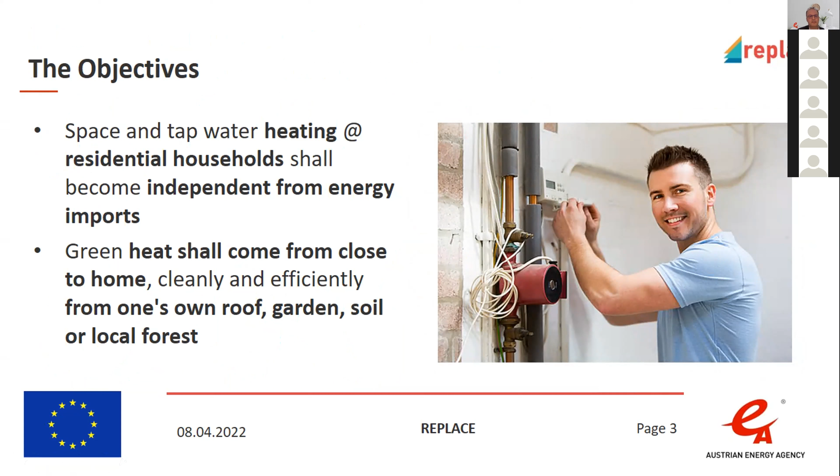Our project objectives: first, space and tap water heating at residential households shall become independent from energy imports. Second, green heat shall come from close to your homes, cleanly and efficiently from one's own roof, garden, soil, or local forests. So it's all about becoming independent from energy imports.

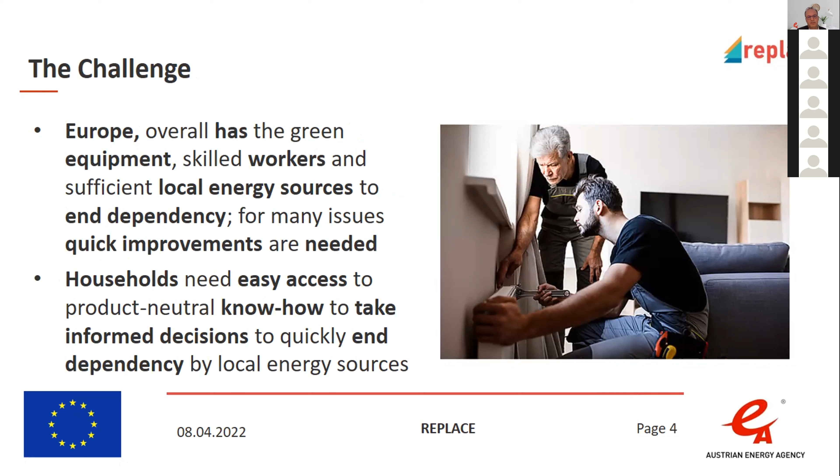In Europe, we generally have the green equipment, skilled workers, and sufficient local energy sources to end this dependency. But many issues still have to be improved, and quickly. From our view, households need easy access to product-neutral know-how to take informed decisions and to quickly end dependency on imported energy through local energy sources.

So we have developed a couple of tools that should be quite helpful to enable informed decisions. One of them is the interactive online heating matrices. You see here, like in a traffic light system, which energy systems fit to which houses in terms of energy consumption or refurbishment status. That's a very quick picture of what system goes with which house.

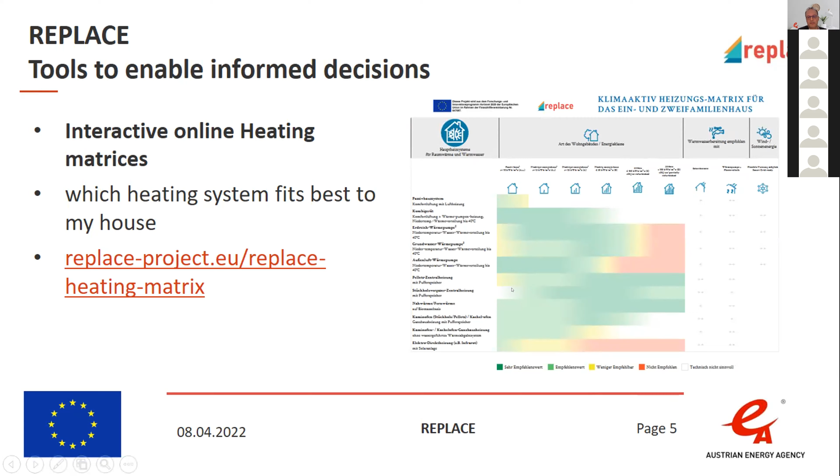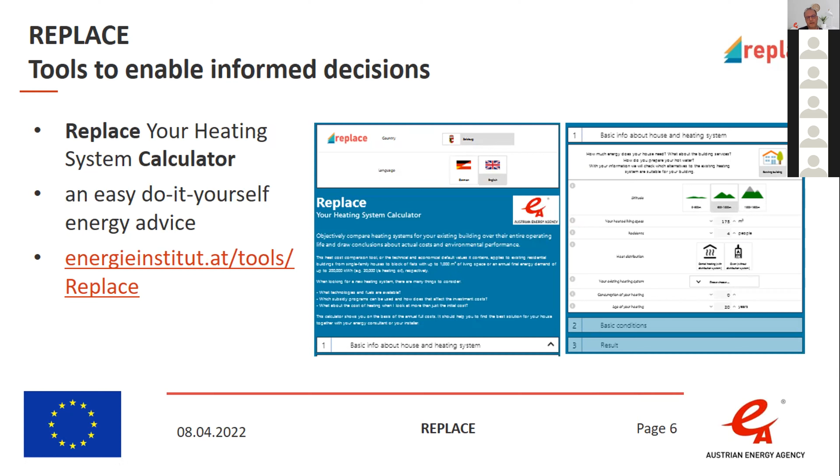Later today I will show you the details of one of our core tools: the replace-your-heating-system calculator. It's a kind of easy do-it-yourself energy advice tool. You will hear more about this later.

We have two handbooks developed with all information useful for households on one side, and a second handbook with information for professionals and investors. All these tools are free of charge and accessible via our website.

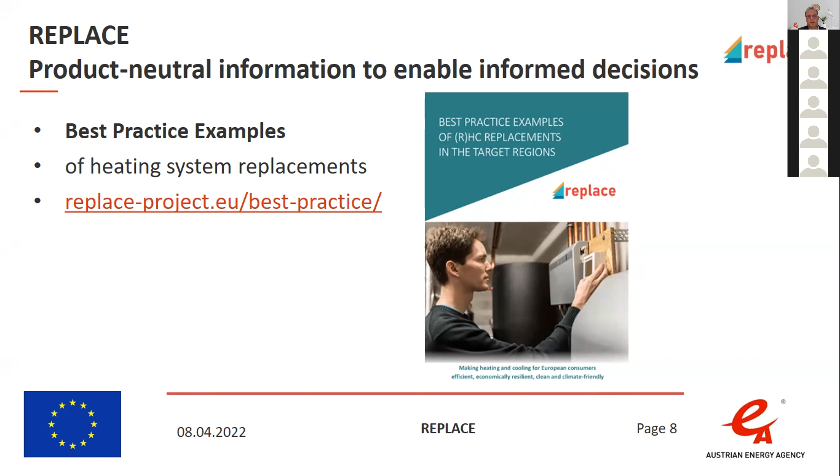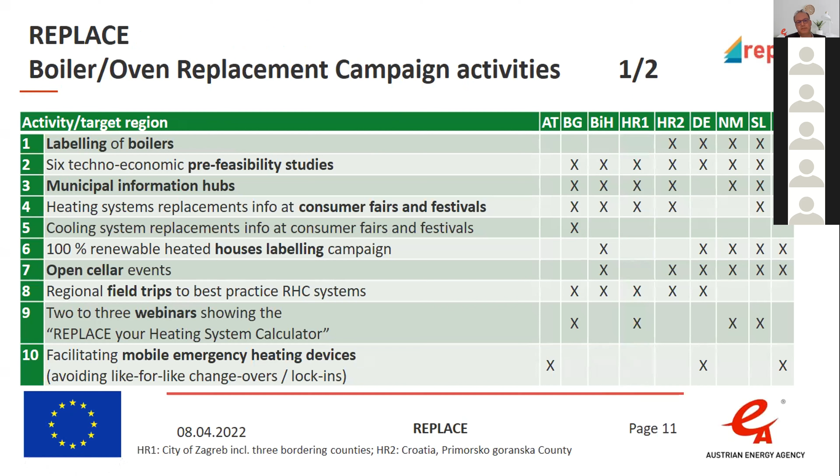Another core point of our action is that we establish local working groups of people who are really active in each region in terms of the heating market, and we developed with them jointly tailor-made activities. There's a long list of activities which we developed over the last 2 years, and for 1 year now we are actually implementing this long list of activities. It's really long—you will hear more about this in the next 2 hours.

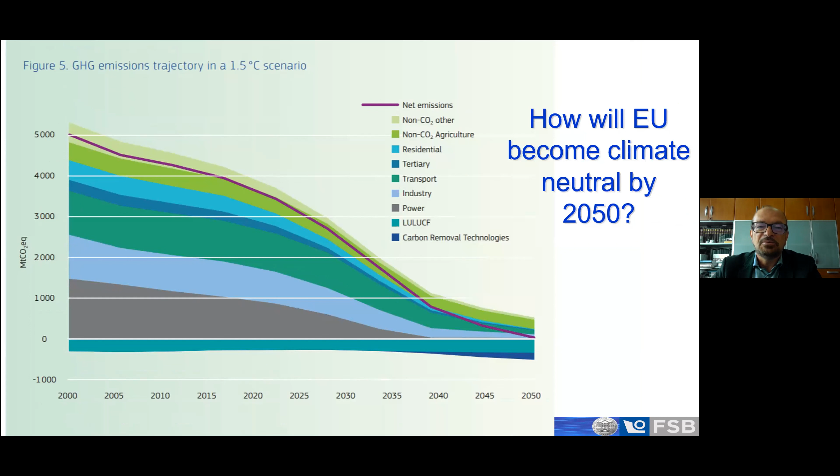I join Dominique in saying how timely this workshop is, and how bad an idea it was to make residential heating dependent on fossil fuels brought from far away, from a country we are now at war with. We obviously have to quickly decarbonize—even from the climate perspective alone, we practically have to decarbonize heating by 2040. One has to take into account that equipment installed for heating usually has around 20 years lifetime, so basically we are still installing fossil fuels in homes, and we have to remove it, from the climate perspective, by 2040. From the energy security of supply perspective, we should do it by 2027, or more probably even by next winter. So there is a certain urgency to do this.

Which are the ways to decarbonize heating? We have four possible pathways. One is district heating and cooling, which is the most versatile way for urban heating, because we can use waste heat coming from industry and services. We can use solar energy, geothermal energy where available, heat pumps, biomass—whatever. Everything can be put into the heat stream and brought to our homes.

Or we can use heat pumps as an individual heating system. There are two other ways which are not so good, in my opinion.

One option is gas decarbonization using biomethane, hydrogen or e-methane instead of natural gas. The problem with such an approach is that we need 5 to 6 times more primary energy in order to produce such hydrogen from renewable sources, which means 5 or 6 times more land has to be used for primary energy production, which is not a very good idea.

Another thing is that we will have lots of hydrogen only after 2040, which is much too late for decarbonization of heating. We have to do it now. Also, biomass boilers, which we use a lot in Southeast Europe, are not really a very sustainable way of doing it because local emissions are hard to control. And anyway, we should use biomass in a cascade for more high added value products and only use waste biomass for heating, preferably in district heating.

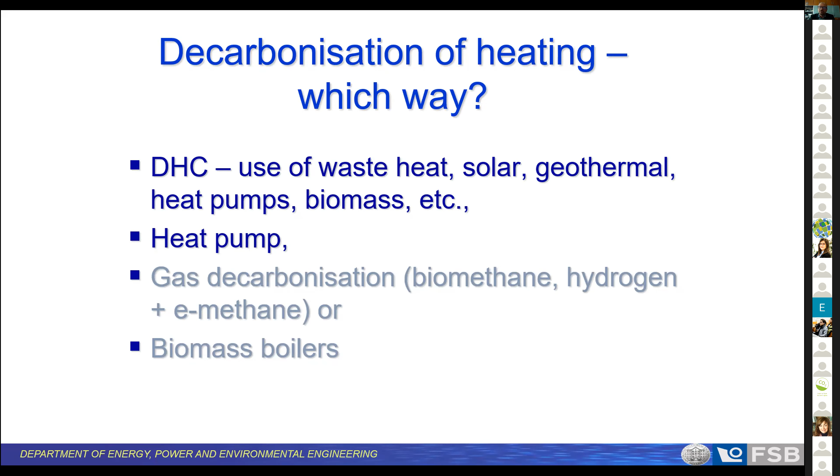What if we all go the fashionable way with heat pumps? One has to think that if we replace all the heating with heat pumps, the heat peak is around 5 to 20 times higher than the electric peak. At low temperatures, when the peak occurs, COP of heat pumps is around 2. That means we need 2.5 to 10 times more electricity, which is not really a way we want to go. We can, of course, solve it with heat storage, but we need around 3 to 4 cubic meters per dwelling.

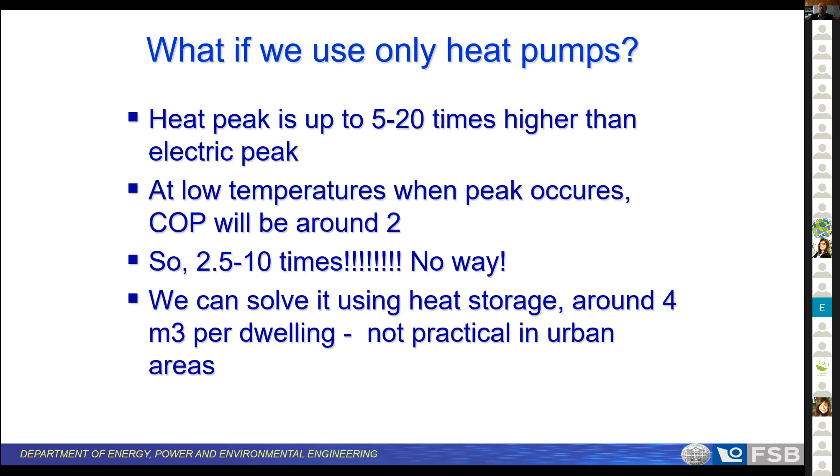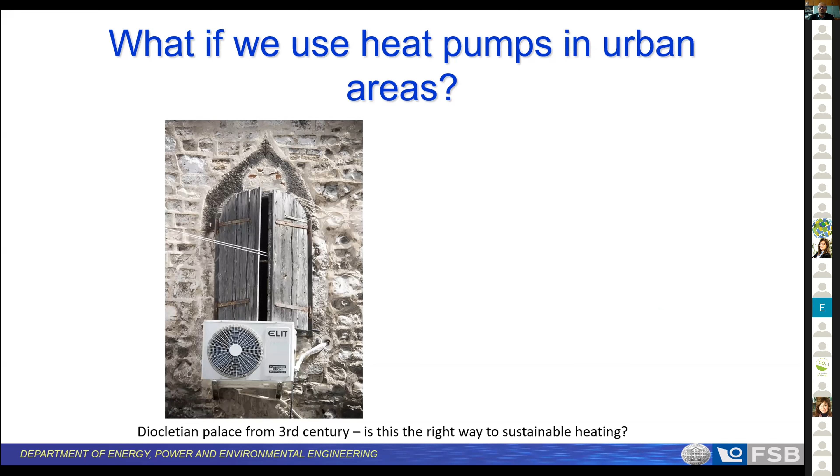That is perfectly okay in rural areas, but in urban areas we don't have space to do that. So district heating is an extremely important way to solve decarbonization of heating in cities. Also, we don't really want to have in lovely urban historic areas something like this. This is from Diocletian Palace from the 3rd century in Split. We think that district heating and cooling is a much better solution for such areas.

Looking at Linz and Wels, where we would love to be, we can see the Heat Roadmap Europe map, which shows which areas are feasible for district heating. Those are the areas where we have high demand for heating concentrated, because that makes district heating viable. You can go and see on the Peta 4 website, and you can see for your own areas where it is feasible to do district heating and where we have to go with heat pumps. We have also done additional maps for Macedonia, Croatia, Bosnia in the Southeast Europe area.

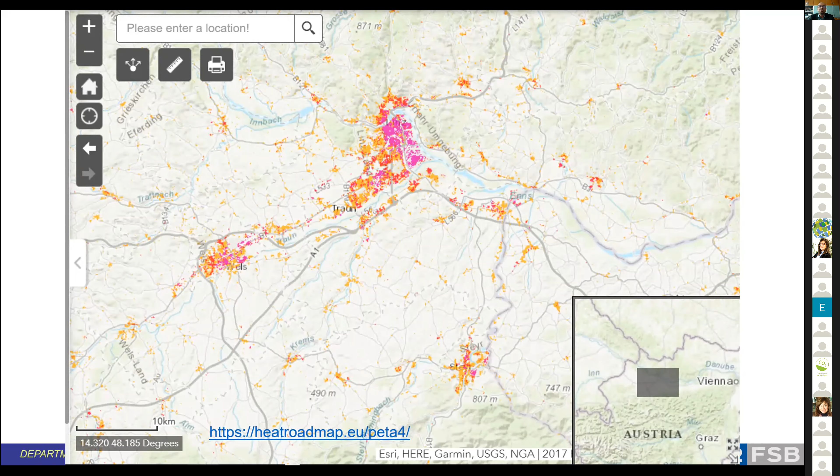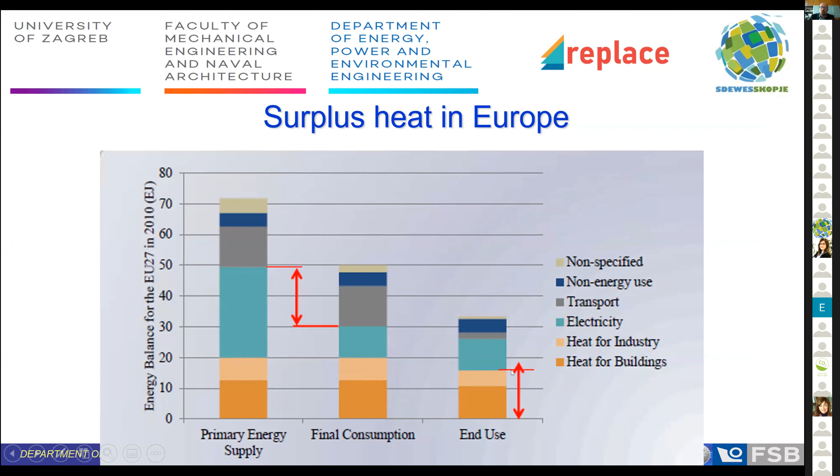If we look at surplus heat in Europe, or waste heat, there is plenty of it. Only from major sources we have enough to cover all of the heating demand in Europe. Unfortunately, we cannot use all that because waste heat is not always where the heat demand is. But in Heat Roadmap Europe, it was shown that around 50% of the heating demand could be covered by waste heat from such large sources.

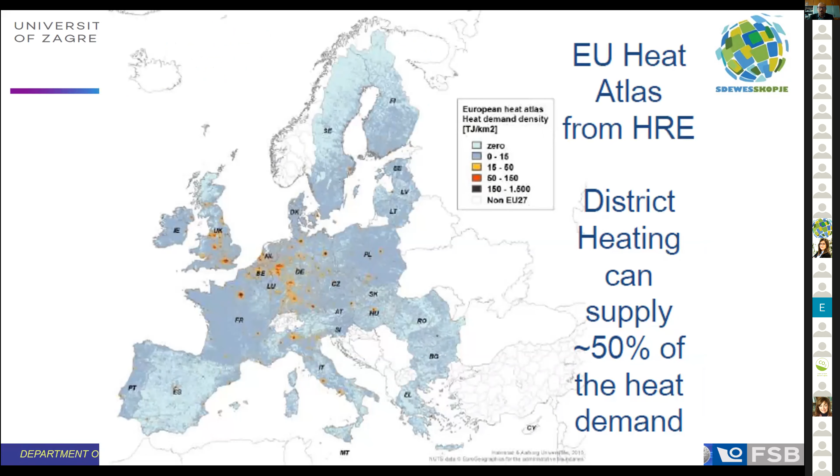Also, we have to think about moving towards 4th generation district heating, reducing the temperature to 60 to 70 degrees in our district heating systems, because this allows us to better integrate power and heating systems, which we will need in future. Because the ratio between heating and hot water is much lower, we have a much more continuous heat load. We need to think about heat storage, because this is a crucial part of the fully decarbonized energy system in Europe. Currently, we will still be using combined heat and power, which will be following electricity demand, so that means we need heat storage.

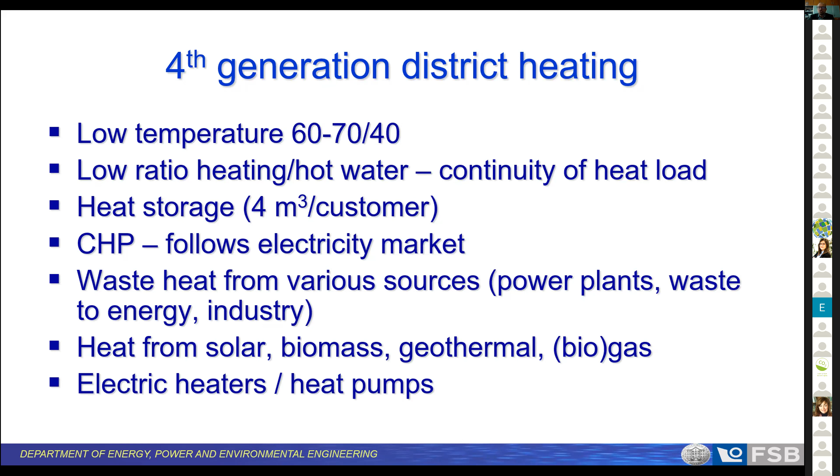We should use waste heat from various sources like power plants at the moment, waste to energy, industry, services, wherever we can find it. Heat from solar, biomass, geothermal, biogas, electric heaters, and heat pumps are solutions that can be used in 4th generation district heating.

If we look at European policy, district heating up to 2025 should have, in order to be called efficient district heating and to be part of the taxonomy and considered a good way of decarbonization, at least 50% renewables, or 50% waste heat, or 75% of cogenerated heat. After 2026, it should be at least 50% of renewables, or 50% waste heat, or 80% of heat from high efficiency cogeneration, or at least a combination of such thermal energy where renewables are at least 5%, and the total share of renewables, waste heat, or high efficiency cogeneration is at least 50%.

So one can see that in time we have to move to more renewables, to more waste heat, and to more efficient cogeneration, which should be completely phased out after 2035. We don't want to use any more fossil fuels after 2035 in district heating.

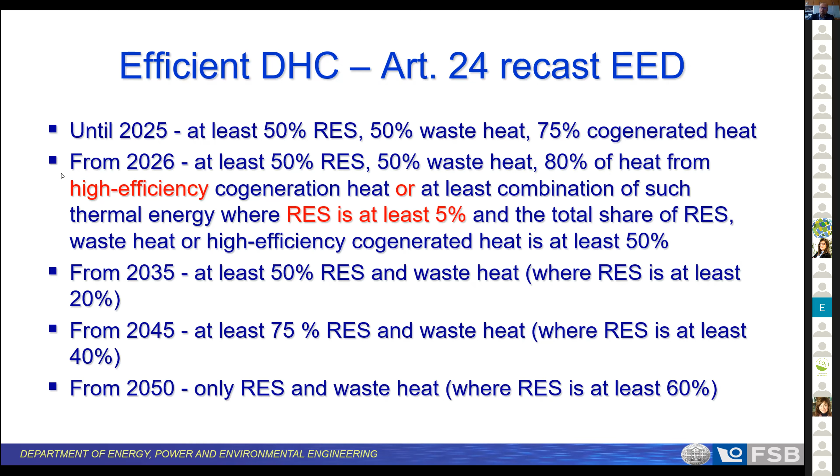We can see this example of solar district heating in Vukovar. It means that even when Russian gas is cheap, as it used to be in Croatia, it's actually viable to use solar district heating for summer demand. So it makes sense to replace fossil fuel boilers during the summertime with a solar system, because then you can supply all the hot water during that period of time.

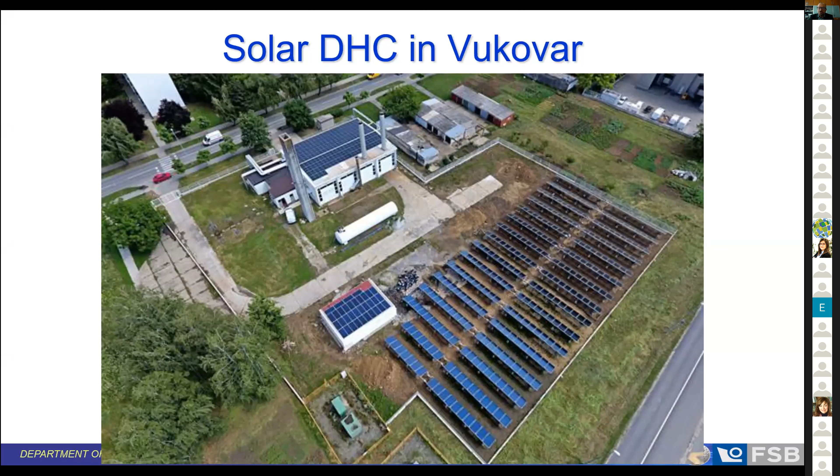The problem with solar energy is that its peak is in summer and we need heating in winter. Therefore, if we want to go beyond summer months into solar district heating, we have to have thermal energy storage. One should note that the price of thermal energy storage falls strongly with size, so for district heating based on seasonal thermal storage, it's actually not very expensive.

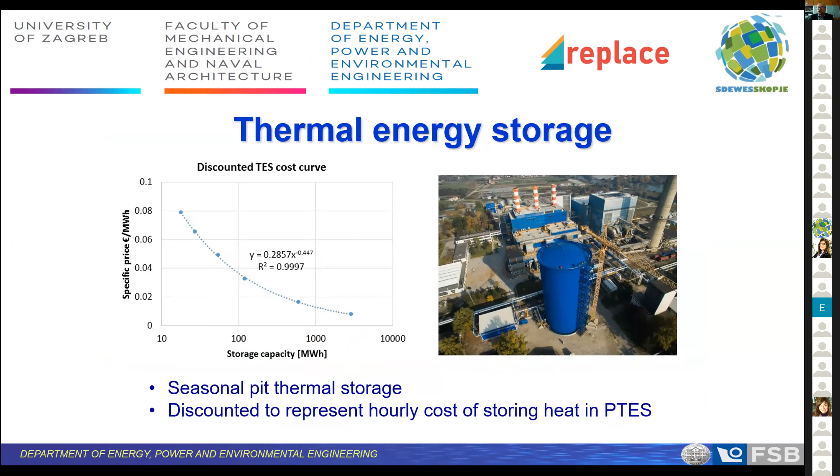Funnily, in Denmark there are a lot of such systems. In Germany there are also such systems. But in Southern Europe, which has much better solar potential, we don't have many such systems. They can actually make financial sense if the financial mechanisms are designed so that the full socioeconomic benefits are taken into account.

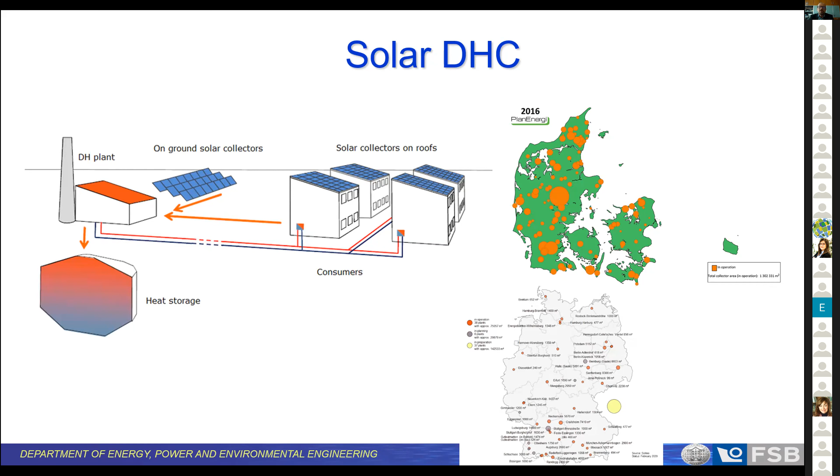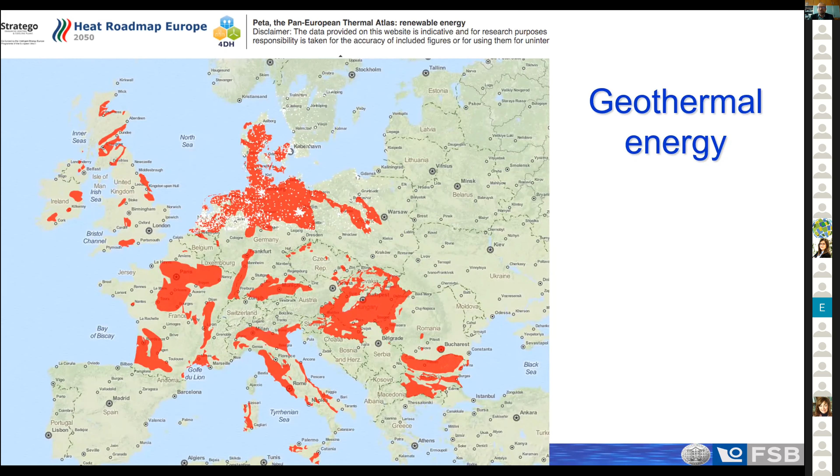One should also note that Europe is full of geothermal energy, and some areas like Pannonia, where I'm sitting at the moment in Zagreb, could be fully heated by geothermal energy. We are not really using this energy because gas is king in those areas, and it's very difficult to penetrate their market share. On the other hand, with expensive gas now coming and the need for fast removal of gas boilers, I think geothermal energy will become very fashionable.

Where do we want to go? We are moving towards a system that will mostly be based on wind and solar. Wind and solar are variable, and we will have to build a big excess of them in order to fully cover the legacy electricity demand, which is time critical. This is the red line. What are we going to do with the excess wind and solar? Well, we can use it to heat, and to deliver it to electrified transport.

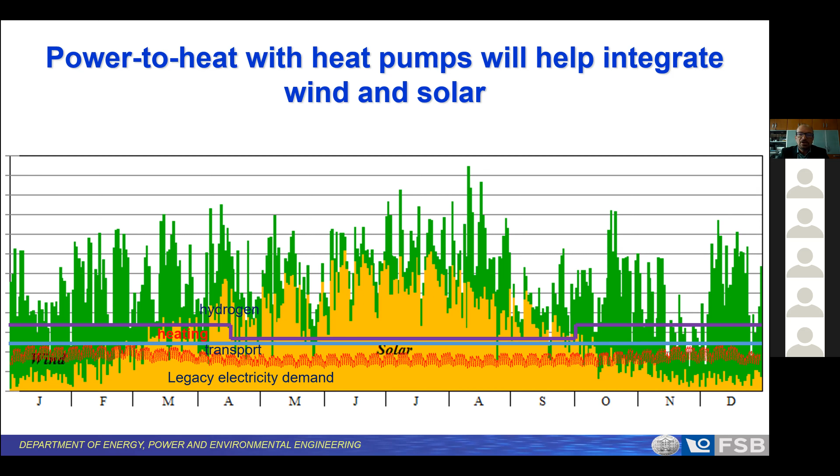Power to heat technologies can significantly help the energy transition towards 100% renewable energy systems. We need this power to heat connection because it is crucial for the future integration of variable renewables.

In conclusion, I would like to say that wind and solar are coming, but they're difficult to integrate. We need to integrate power, heating, cooling, water, and transport systems as soon as possible. We need smart energy systems, which have to be cheap and simple. We have to concentrate on district heating, which is very versatile in integrating various heating flows in urban areas, and heat pumps in rural and suburban areas. We should integrate all kinds of renewables, including renewable electricity. We should take care to use biomass only in cascade, not really chopping trees for heating, but using wooden biomass for higher added value purposes and only waste biomass for heating.

Thank you very much.

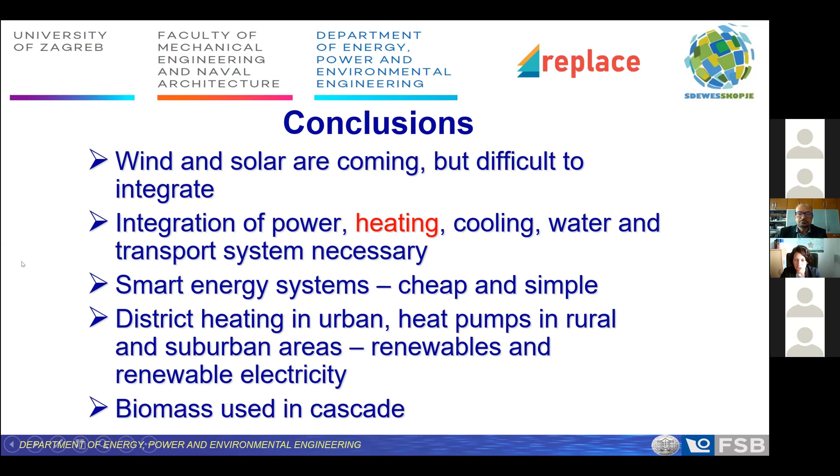Greetings from Munich. Many thanks for your very nice presentation. I am part of the WIP team, though I have not been directly involved in the Replace project, so maybe this question is already answered. When you talk about waste heat from power stations and industry, isn't that waste heat from fossil sources mainly, currently? We know especially energy intensive industries have a lot to do to replace their fossil sources, so maybe there will be less waste heat in the end. It seems even more complicated than you were saying. How would you respond to that?

Yes, you're completely correct, it's now mostly fossil energy. But waste heat is the heat that would otherwise be lost into the surroundings. So if we catch it instead of wasting it into the environment and polluting the environment with this heat, we are actually doing a great service to the environment because we are not using other energy for heating. And we have it today.

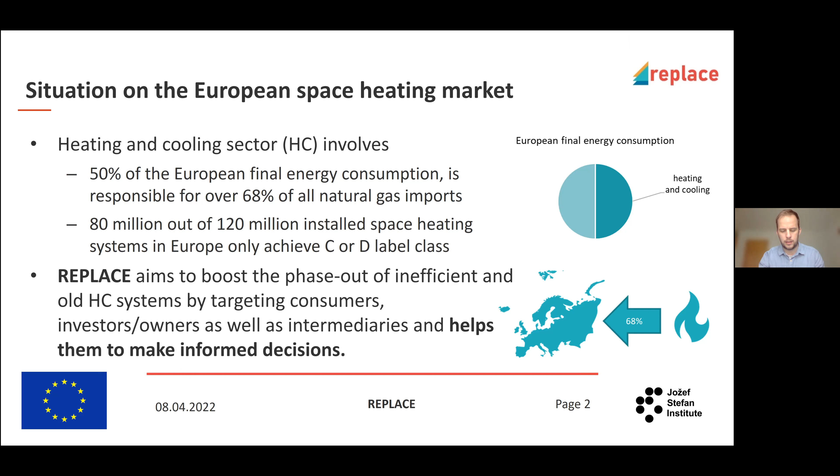Replace project therefore aims to boost the phase out of inefficient and old heating and cooling systems by targeting consumers, investors and owners, as well as intermediaries, and helps them to make more informed decisions. Facts regarding high share of inefficient boilers, need for fossil fuel replacement and energy independence give rise to motivate end consumers to replace their equipment as quickly as possible with more efficient, environmentally friendly alternative systems.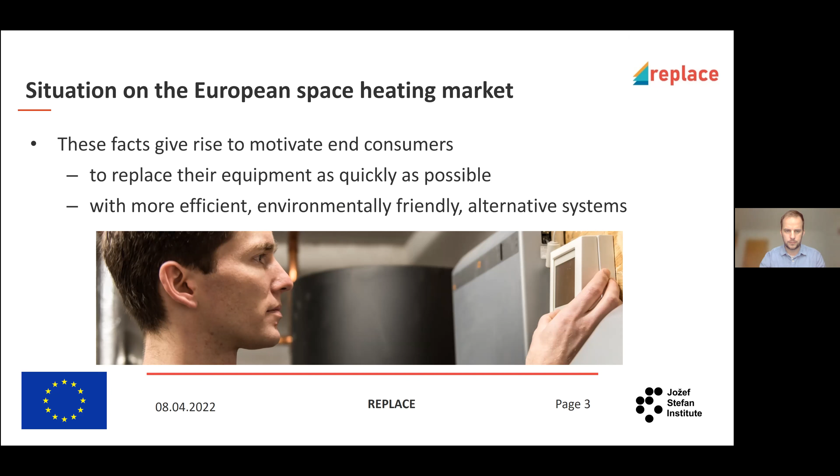This is the point where Replace project comes to aid. The first overall objective of Replace project is to implement targeted campaigns to make heating and cooling for European consumers efficient, economically resilient, clean, and climate friendly.

All activities proposed by Replace aim to inform and motivate consumers to replace their old and inefficient heating and cooling systems with better, greener alternatives, with the benefit of monetary savings and improvements in air quality, comfort, safety, and security of supply. The project focus is on the residential heating sector.

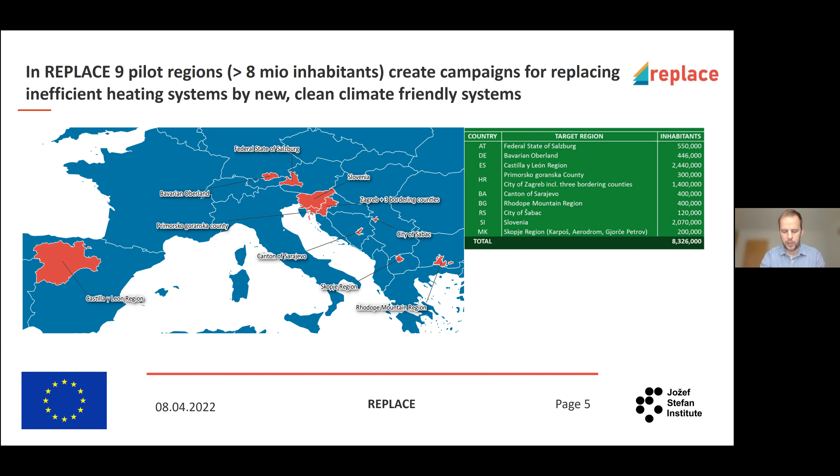Replace project overall targets over 8 million end consumers directly, with an estimated direct impact of about 8 gigawatt hours of primary energy savings. To actually transpose the project's objectives during and beyond project life, every project partner establishes and cooperates with a local working group, which comprises local and national key stakeholders residing in their targeted regions.

Key members of the local working group actively support the implementation of project findings in the target regions. All consortium partners can rely on strong local networks and are perfectly placed to steer the work of the local working groups, that also improve existing replacement policy programs and implement tailor-made policy measures facilitating the execution of the campaigns.

One of the most important results of our projects are the tools that can be used in order to aid the decision-making process. When replacing inefficient heating systems, the Replace heating matrices provide an initial overview. They show which type of heating system based on renewable energy sources or a connection to district heat is most suitable for single or double family houses or for larger volume buildings.

What kind of system is recommended depends on the energy need for heating according to the energy performance certificate.

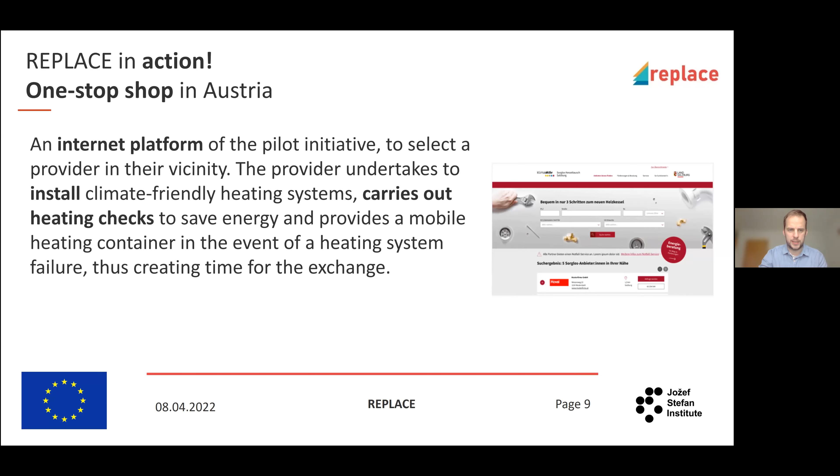The next success story is from Bulgaria. Replace project partner BSERC was directly involved in increasing the subsidy for renewable heating systems at the national level sevenfold, to 70 million euros. To ensure end consumers have climate-friendly pellets for the coming winter, BSERC is also organizing a joint purchase for municipalities in the summer of 2022, which will also positively affect the energy price.

In Spain, they have a new subsidy scheme. Project partners EREN and ESCAN organized a workshop for professionals, where 41 participants learned more about climate-friendly heating so they could pass that knowledge on to end consumers. Project partners also made knowledge about biomass directly available to end consumers, where 200 houses and 200 boilers are getting an information label. Ten information hubs have already been established, and most importantly, a new subsidy scheme developed by EREN is helping switch a total of 10 megawatts of residential boiler capacity from fossil fuels to biomass within a few months.

One more story is from Slovenia. There, everyone who wants to apply for a subsidy for climate-friendly heating automatically benefits from the Replace heating system calculator. This is because the office that awards subsidies advises all applicants that they can calculate their energy and monetary savings using the Replace heating calculator, where they receive information on suitable climate-friendly heating systems for their exact situation for their funding application. Furthermore, there was a collective action where we switched over 134 oil boilers to heat pumps. So this would be all from my side.

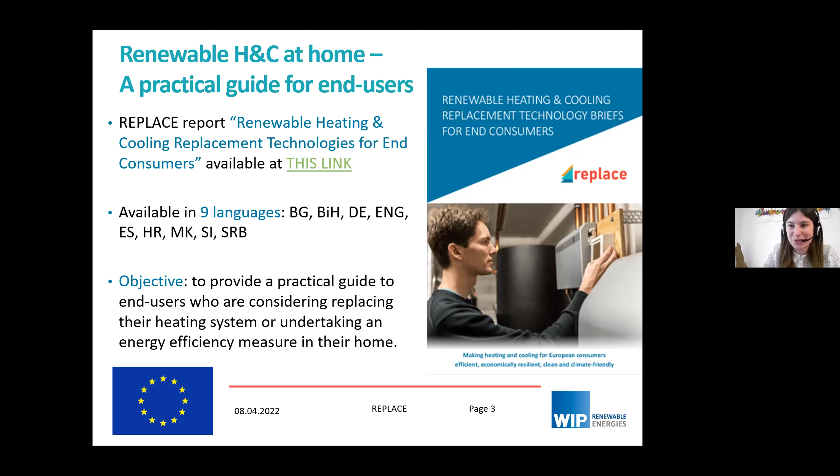Of course, I cannot read the whole report right now, but I hope this presentation catches your attention and attracts your curiosity so you might want to download and read more about it. To give an overview, the report provides useful information on the benefits of replacing an old and inefficient heating system with an innovative low carbon and renewable system, covering the economic, environmental, and social benefits.

We advise consumers on the steps they should take to make an informed decision when replacing their heating system. We provide answers to the most frequently asked questions end users ask in the replacement process. And last but not least, the report includes nicely illustrated and colorful technology fact sheets for each technology covered.

So which technologies are covered in the report? When you want to replace your heating system, there are so many options on the market today. The Replace project covers all the renewable heating and cooling options available in the European market, including biomass boilers for wood pellets, log wood and wood chips, modern wood stoves and pellet stoves, heat pumps, solar thermal systems, photovoltaics, renewable cooling, multifunctional facade systems, as well as other options that improve building efficiency like collective actions, shading and insulation, and infrared heating systems.

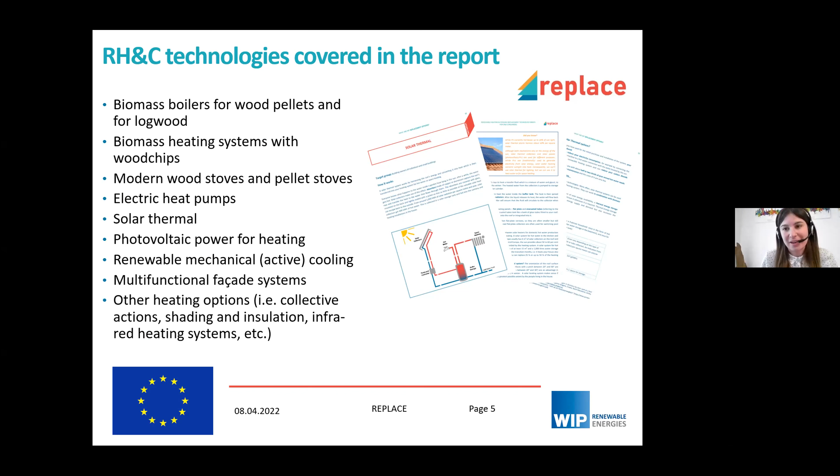One of the probably most interesting chapters for the end user is the one which advises on the steps to take when undertaking a replacement process. Just to give you an idea of what's in the report, we list all these steps, described in more detail there. For example, the first step is to get familiar with the technologies available on the market, and the Replace handbook is a very good tool for that.

As a second step, if you want to replace your heating system, you should check whether total or partial insulation of your building shell is needed on top of the heating system replacement, to ensure good and efficient functioning of your new system. You should get in touch with an energy advisor who can advise you on the best solution for your home, and estimate the benefits and costs of the replacement.

You should, of course, contact an installer to install your new system. Whenever possible, apply for regional and national incentives, which are available for many renewable heating technologies across several countries and regions in Europe. And lastly, just enjoy your new system and spread the word about how great it is.

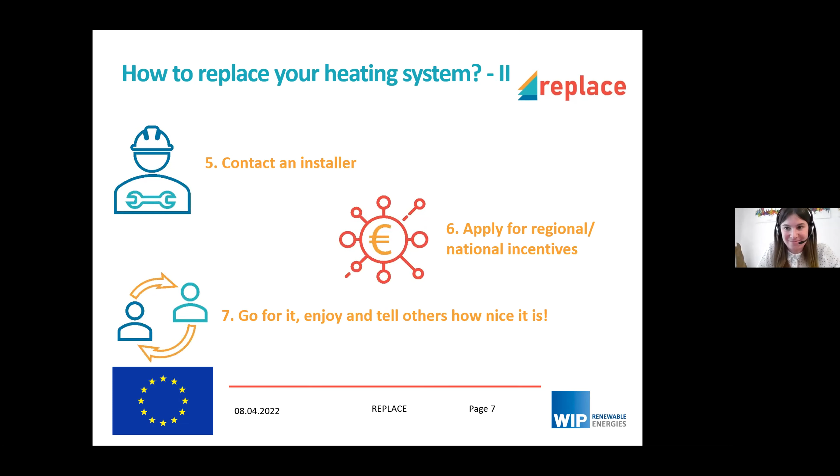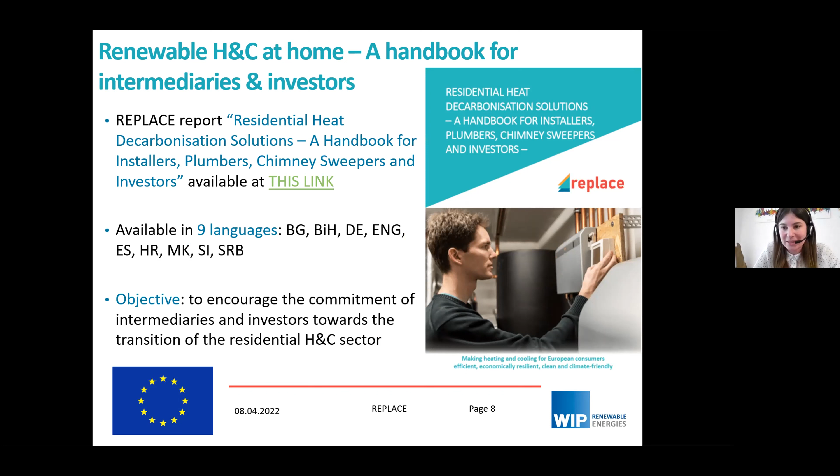The second report I wanted to present is the one we prepared for intermediaries and investors. This is also available on the Replace website, in the same 9 languages. Its objective is to encourage the commitment of intermediaries and investors towards the transition of the residential heating and cooling sector. By intermediaries, we mean installers, chimney sweepers, building developers, and energy advisors, and we provide them with in-depth knowledge of the renewable heating and cooling system options available on the market today.

In the report, we also provide tips for intermediaries on how they can become well-trained facilitators of replacements and communicate the benefits of these innovative renewable heating solutions to their customers. Because, as Dominic mentioned at the beginning of this workshop, one issue today is that not all installers are aware of all the benefits of the renewable and latest technologies on the market. The report also addresses investors—financing institutions, public authorities, energy suppliers, and homeowners—providing information about economic issues, best practices, and innovative business models and model contracts for renewable heating and cooling solutions.

Just to cover some of the chapters of the report, one of the chapters provides really practical tips to intermediaries on the replacement project phases they should undergo step by step when having a new customer and replacing their old heating system. So of course, the first step is conception and consultation with the customers, planning of the replacement project, design of the replacement project.

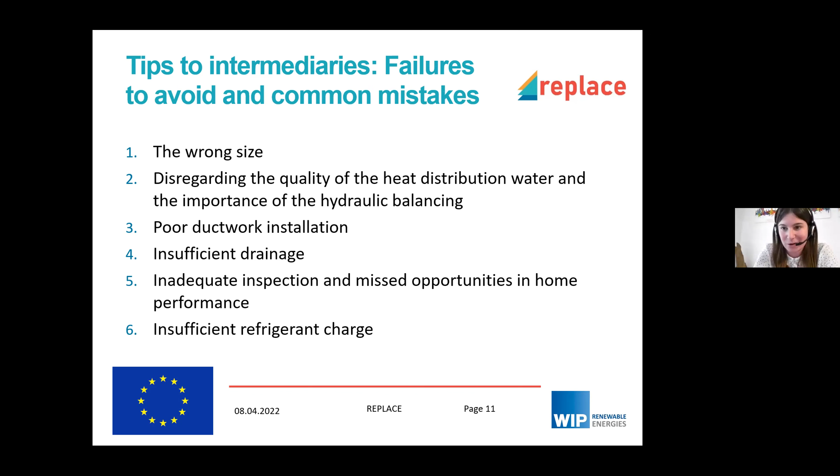This report for intermediaries and investors also includes fact sheets for the technologies covered by the project. The fact sheets are very useful tools for installers, because for each technology they say what is the best building type for that kind of technology. They provide planning guidelines and recommendations for installers, which technologies match with each other, and also suggest selling points for installers to convince their customers about the benefits of the renewable heating system they are trying to sell.

As I said, the report is directed not only to intermediaries and installers, but also to investors. For example, the chapter on investors covers the reasons why investors should invest in renewable heating and cooling. There are many reasons, and more details are in the report, but they include the high economic returns and the instability of fossil fuel prices, which we know today better than ever before.

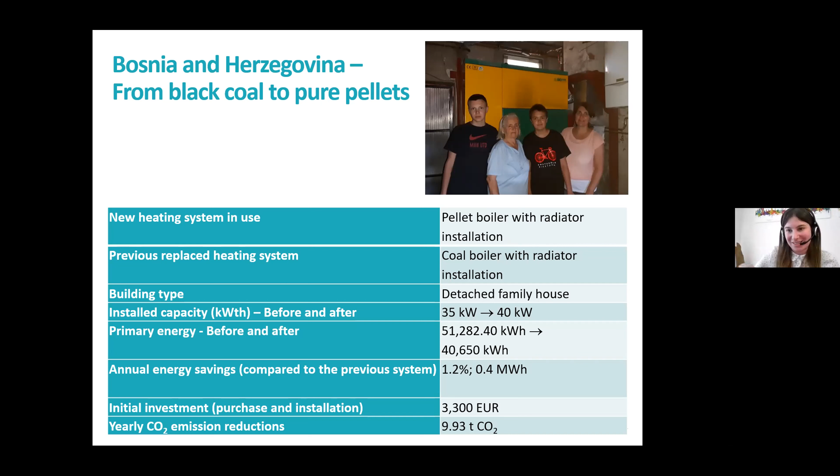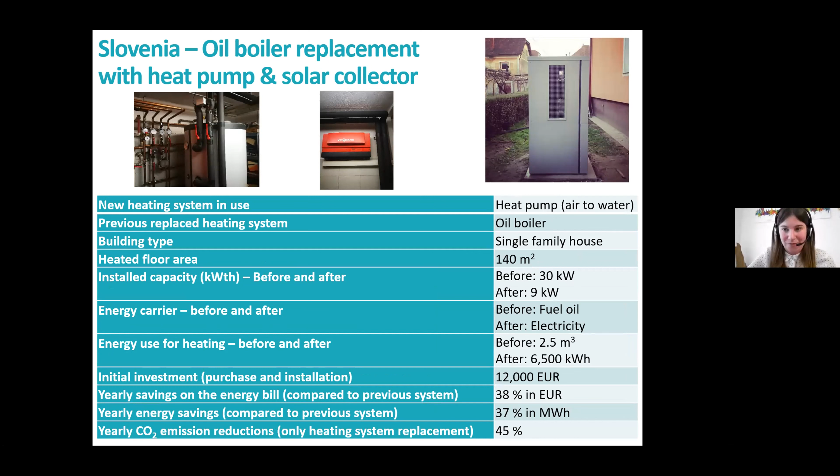Similarly, here in Slovenia, we had the story of a family which replaced their oil boiler with a heat pump and a solar collector together. And again, this switch brought significant benefits to the family and to the environment.

And last but not least, the example of a mobile heating unit in Germany to work as a bridge during the replacement phase of an old heating system into a new one running on wood chips. Since the replacement would take some years, the building in this case, the swimming pool of the city of Penzberg, decided to replace temporarily the heating system with a mobile container unit, which runs on renewable wood chips.

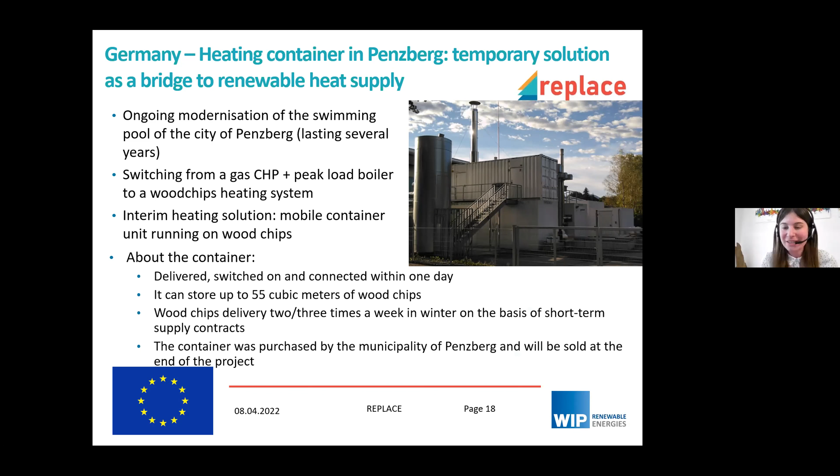We have a similar example also in Austria, and you can find many more in the report. And yes, all the reports, as I said, are on the Replace website. And if you have any questions, just feel free to ask.

Thank you very much, Benedetta, for your overview of all the handbooks and fact sheets that we have created in the Replace project, and also for the real life examples. I think it's always really nice to say that at the end of the day, it's real families who are actually saving money and also helping the environment. So that is lovely to see.

I don't see any raised hands. There was a question in the chat, a very good one on barriers, because we've now seen obviously every day you see fossil fuels is not a good idea. So the question is, why haven't we already done that? I think I will take that to the panel, because I think everybody will have something to say to that.

There is a question, I think, that is directly for you, Benedetta: to what extent can these tools be used for non-residential buildings?

Yes, so the main target of the project is residential buildings, but well, definitely some of these technologies can also be applied into non-residential buildings. Probably the fact sheets of the end users report and of the intermediaries and investors report really refer more strictly to residential households, but otherwise the description of the technologies is valid also for non-residential buildings.

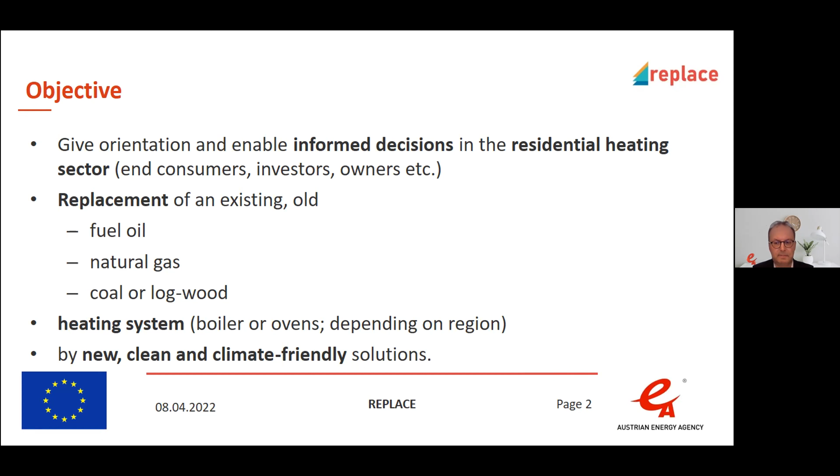Given you have an old fuel oil, natural gas, coal or logwood boiler or direct electric heating, this tool helps you to quickly see what information helps you to make a decision to move to an alternative renewable heating system.

So the basic situation normally is just that you have to think a lot about when you want to make a changeover, which technology, what fuels are available in your region. Do you have the possibility to connect to a district heating grid? Can I calculate some subsidies? Are they available? What are the costs of the heating system itself? And can I get an estimate what my annual costs will be, also including the investment, the upfront costs? This calculator gives answers to all of these questions and should enable the users to find quickly the best solution for one's house.

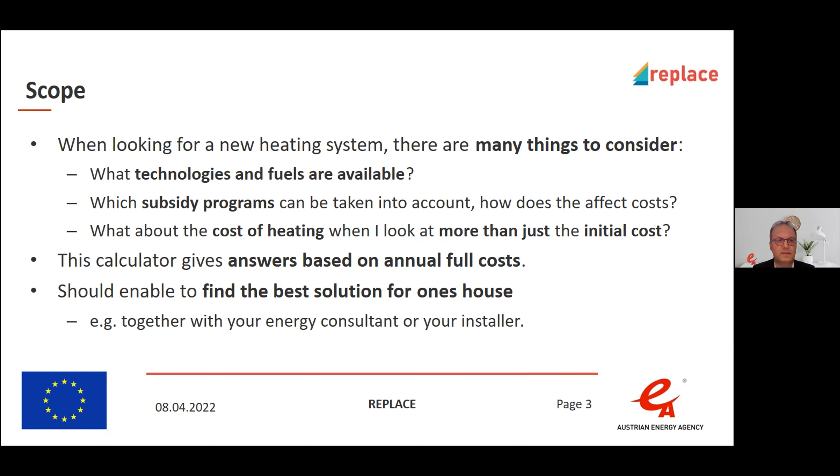This tool can also be used by professionals or for businesses, so there's wide scope to use it. The tool is free of charge, and there's a website address where it's available, and the partners will constantly update the tool.

It's multilingual, and it also has default values inside, which I will show later. The tool is also a white label tool, so businesses and professionals can integrate this calculator via a frame into their own website, or they can place a link to the calculator on their landing page.

If you are interested to use this tool as a white label tool, just contact the national project partner, they will help you. The calculator will be hosted until end of November 2025, so that's also a period that makes sense to integrate it into your business if such a tool is not available yet in your region, which is the case in many countries, as we experienced.

As I told, the tool was developed based on an existing tool in Austria. It features 8 European target regions and works in 7 languages, including for every region a version in English. The tool features technical and economical default values for a range of houses, starting from single family houses to larger blocks of buildings. It can cover default values up to 20,000 liters of oil consumption equivalent, so that's a far wide range where the tool can be applied.

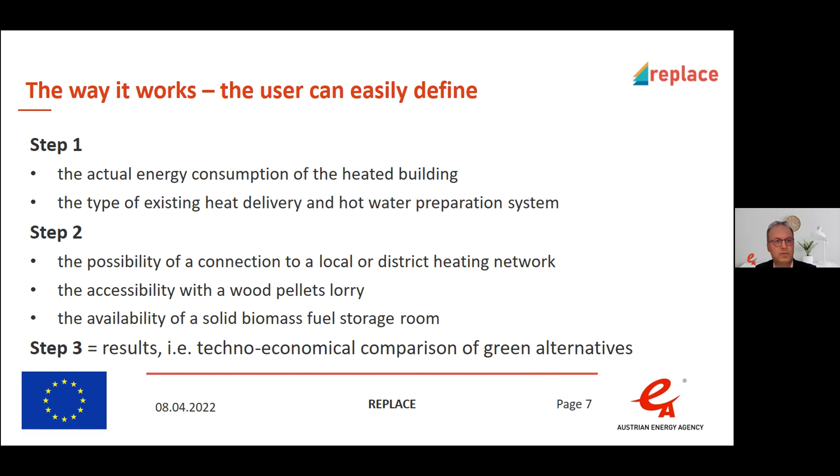I think I will show you this best within the tool. There's also a quick mode if you are a newcomer to this topic, or there's a professional mode if you don't just want to rely on default values, but if you have concrete prices and costs based on offers, you can input those actual costs for your situation. The tool also features the fact sheets that Benedetta told us about before, useful contacts, and best practice examples. All of those things are integrated into the tool.

Now I will show you live how this tool works to give you an impression. I will share my browser to give you an insight into the tool.

Just a quick example of how this tool works. Can you see it already? Thank you, Herbert. Yes, everything is good.

You start by selecting a region. I select, for example, the region in Austria. In Austria, we have 9 provinces, and I choose the province of Salzburg. Then I choose English so that all of you can follow.

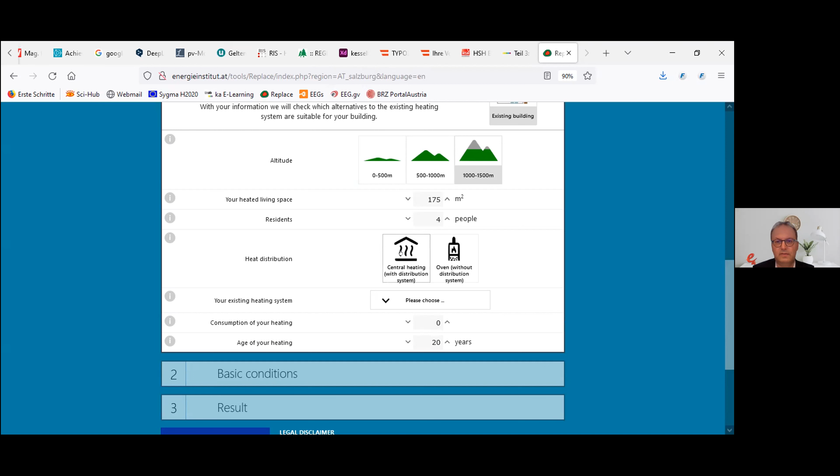You select the altitude your house is situated at, then give in the living space and the number of people living there, and whether your existing system is central heating or an oven. I select central heating, and then for both types of heating systems you can select the energy carrier currently heating your house. There's a wide range to choose from; for my old system, I choose oil boiler.

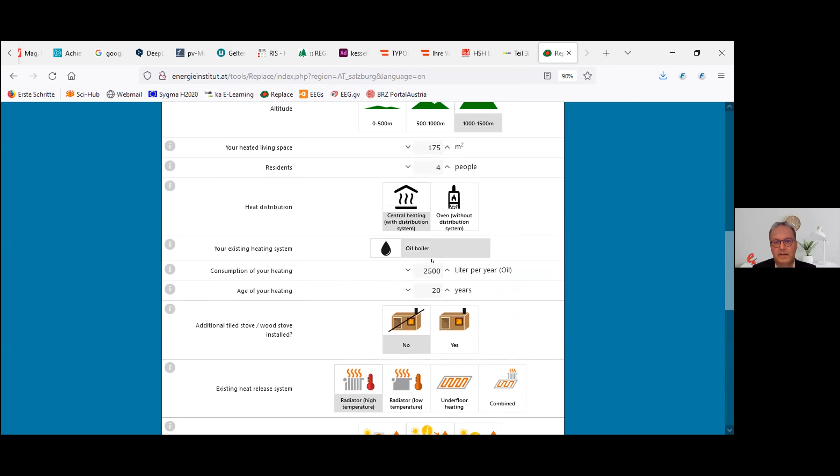Then the tool automatically suggests fuel consumption for a typical single family house in Austria, this would be 2,500 liters. I leave it as it is, and then you can select the age of the boiler, which determines the efficiency of the whole system. You can also add any type of stove if it's existing and enter the consumption, but I leave it as it is.

Then you'll be asked for the type of heat release system, whether it's a high temperature system or a very low temperature system. This also has an influence on the technologies you will be recommended, and on subsidies available, if any, because in some countries, if you have a radiator, a heat pump won't be subsidized, for example, and the tool takes that into account. I leave here the radiator.

Then you can determine for your new heating system whether the system also provides domestic hot water or not.

And then you can also choose if you have a solar system or not, or if you want to have a new solar system, for example, and for what purposes this solar system should work—if it's just for space heating, just for tap water, or also for space heating. Then you confirm. That's all you need to know about your home.

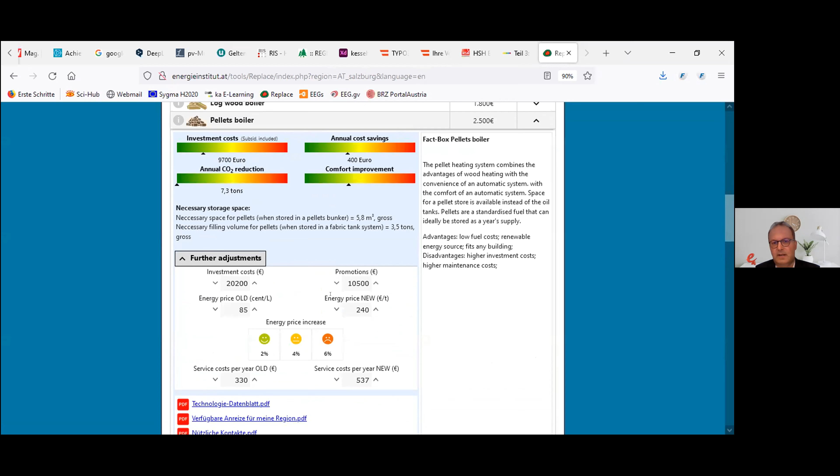So the default value would be 20,000 euros investment, 10,000 euros promotion. Here you can change the energy prices of the old system, oil, and the new price of pellets. You could also change the maintenance costs of the old system and the costs of the new system. And then, for example, now the oil prices are much higher currently.

And then you would have to update, and you would see that the cost savings increased from, I think, 400 euros I had before to 2,300 euros.

So that means you have a very quick overview, and you can get a lot of information from this tool, with many technology options to choose from. I think this tool is really helpful, and I recommend you take a look into it. There's a lot of additional information—for example, myths and facts—and also whether you should refurbish your house before changing your boiler. All these things are covered by this tool. So that was what I wanted to tell you about this tool.

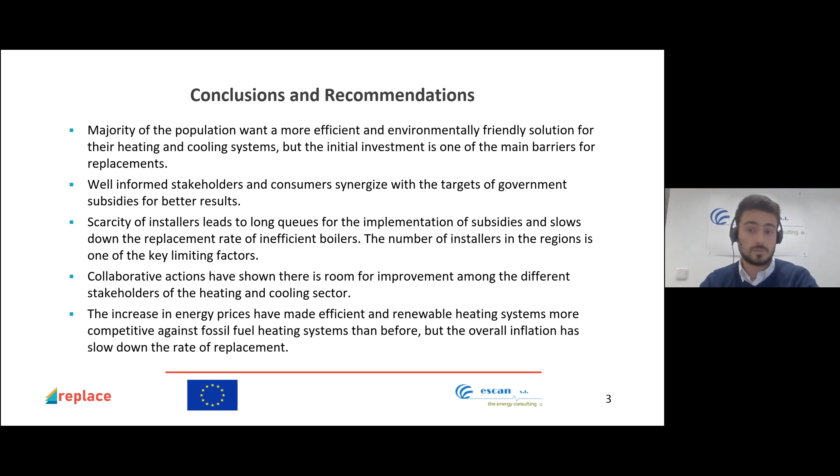And in order to maximize this number of boiler replacements for renewable systems, a skilled workforce is necessary, and at the same time is a key limiting factor.

Lastly, depending on the region, the increase of gas and electricity prices have had different consequences in the mindset of the general population and the prices related to renewable heating and cooling systems. Firstly, higher gas prices are making fossil fuel heating systems less viable and appealing than before, making consumers look for other alternatives such as biomass, heat pumps, geothermal, or solar heating.

Although in regions where the electricity mix depends heavily on gas, there have been higher electricity prices, and so alternatives such as heat pumps have become less desirable than others like biomass. But on the other hand, other regions where biomass is not produced locally have also seen an increase in the price of pellets due to the increase of fuel prices for the transport that the pellets require.

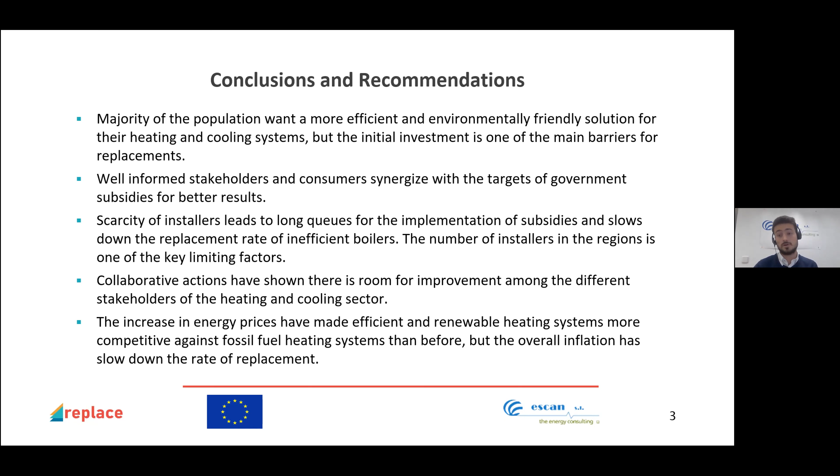Even though most prices are increasing, the increase is considerably higher for fossil fuels than it is for biomass, electricity, or other renewable sources. So the replacement of inefficient fuel boilers has become more desirable than it was a few months ago, but the rate of replacements has slowed down due to the overall inflation in prices.